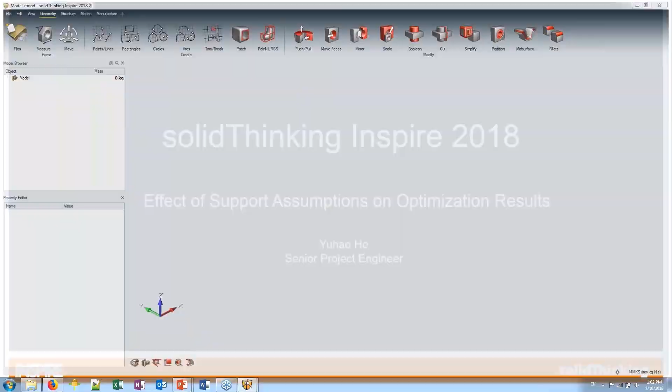Yeah, thank you, Tyler. I'm Yuhao from Altair, and today I'm hosting this webinar about solidThinking with GoEngineer. Today's topic is about the effect of support assumptions on optimization results.

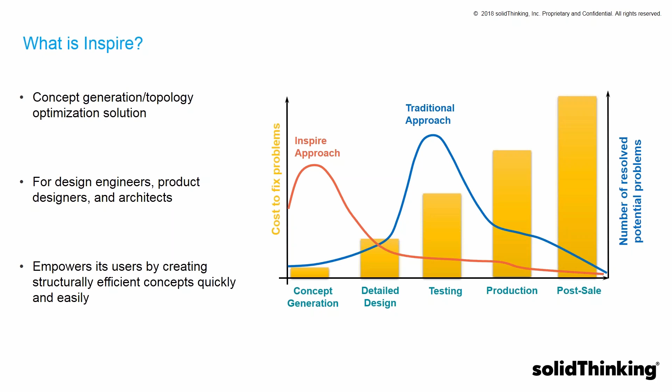With Inspire, the idea is to help engineers identify and fix problems earlier, especially in the concept generation phase. So a lot of potential problems will be identified and fixed in the concept generation phase, so that fewer problems will be identified and fixed in the later stages. This way, the company can save development cost and development time by using Inspire.

Today we are going to mainly talk about three topics. What are support assumptions? How Inspire can help users take those into consideration, and why proper assumptions are important. First, what are support assumptions? Here, I'm going to use this example to explain.

In this example, there is a vertical I-beam and a horizontal I-beam, and I'm designing a bracket to connect those two parts. A 5,000 Newton load is applied on the end of the horizontal I-beam, and there is a 5,000 pretension load on each bolt. There are 16 candidate positions for the ribs, and I would like to determine the best positions for 6 ribs.

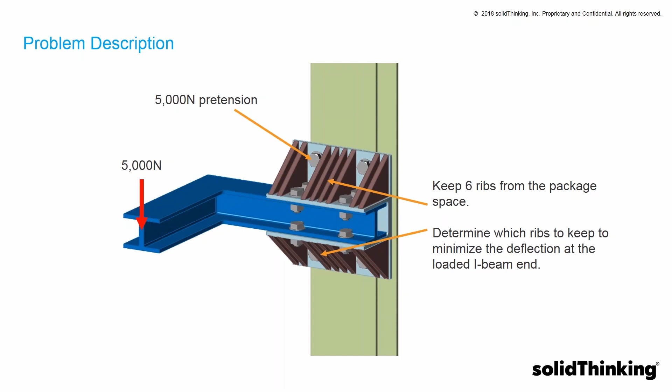That means I would like to keep only 6 ribs, but achieve the maximum stiffness so that the loaded end of the I-beam will have the minimum deflection. So today I'm using topology optimization to answer a pretty classic engineering design problem instead of creating any organic or innovative structures here.

So for the simplest setup, we could set up the optimization problem by fixing the 4 bolt holes attaching to the vertical I-beam, and applying a remote load through a spider, and the load will be applied to the bolt holes connecting to the horizontal I-beam.

With this assumption, we actually assume all loads are transferred through bolt holes, and the vertical I-beam is very stiff, much stiffer than the bracket, so its compliance can be ignored. And the horizontal I-beam stiffness won't change the load path in the bracket.

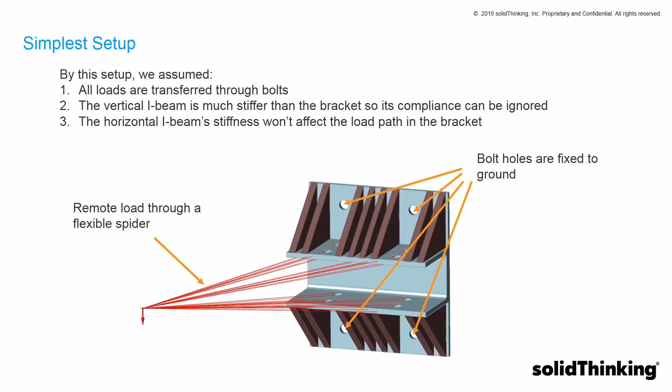So what are we missing here by this assumption? First, we miss those 2 I-beams that have comparable stiffness as the bracket. Also, there is contact between the bracket and the I-beam, and also the pretension bolt.

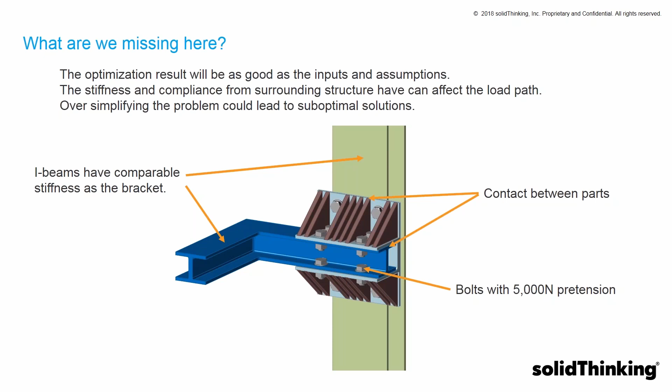As we may know, the optimization results will be as good as our inputs and assumptions. And the stiffness and compliance from surrounding structure can affect the load path in the bracket and also the topology optimization result. If we oversimplify the problem, we could get a suboptimal design or solution.

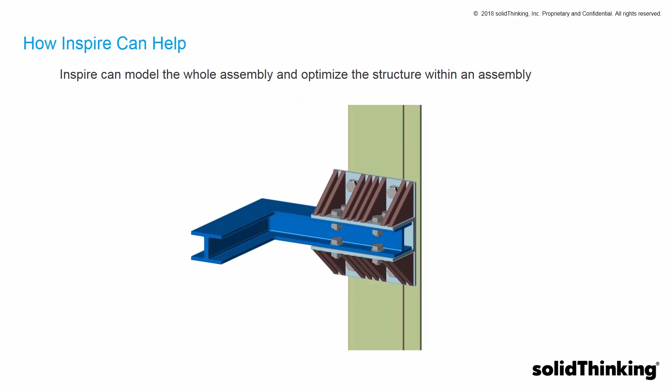So how can Inspire help here? First, Inspire can model the assembly and optimize the structure within a complex assembly. Also, Inspire can simulate the contact with different levels of complexity. I will explain about those later in more detail. And also, Inspire can model the pretension load, pretension bolt.

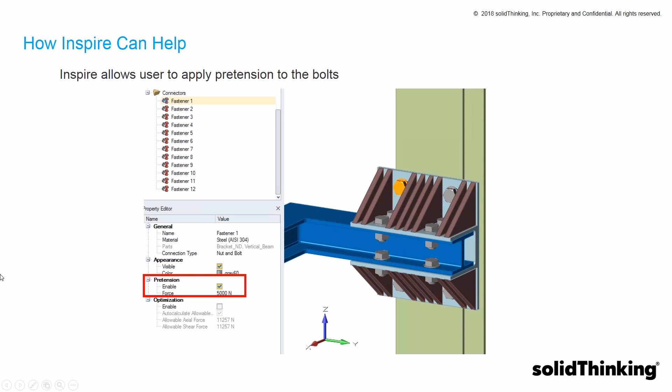Why are proper assumptions important, or what difference can we produce with different kinds of assumptions? Here, I'm having 4 different levels of complexity to target this problem. That is, keep 6 ribs from the 16 candidates and produce the stiffest design. The first simplest setup is I only model the bracket, so there is no contact, no bolts at all.

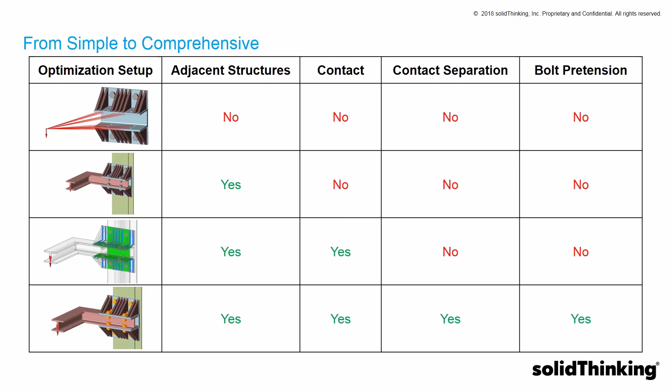Here is the summary table of different setups and assumptions. First, as you can see, with different setups, the optimization gives me different designs. And with these 4 setups, the designs are all different. They all have 6 ribs.

To compare their performance, I use this full design space as a reference point, because no matter how I optimize the 6-rib design, it won't be as stiff as this 16-rib bracket. I just use its performance as a reference point. And the displacement value is the displacement at the end of the loaded I-beam.

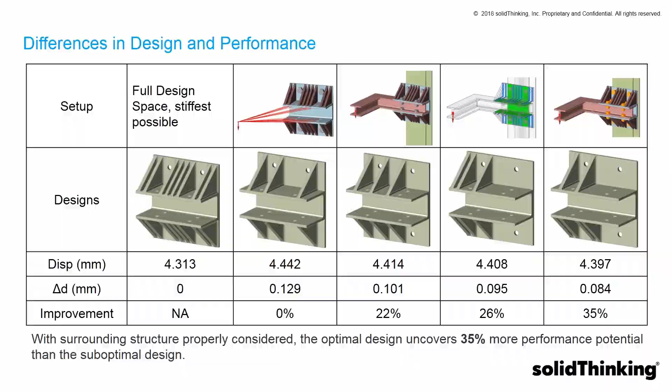And here you can see, with the surrounding structure properly considered, the optimum design can uncover 35% more performance potential than the suboptimal design. I'm going to show you 2 setups in Inspire. One is the simplest setup, bracket only, and the other is the most comprehensive one. First, as you can see, Inspire can read most common CAD formats.

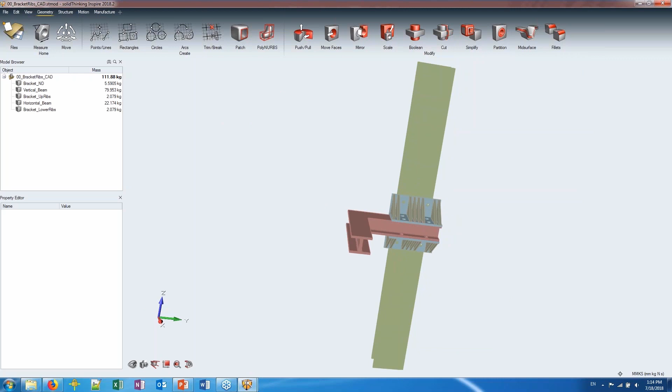Here is the model. First, I'm going to apply a remote load at the end of the I-beam, and I need to determine the center of this end. You can see it snap at the end, so it's very easy to determine the geometry.

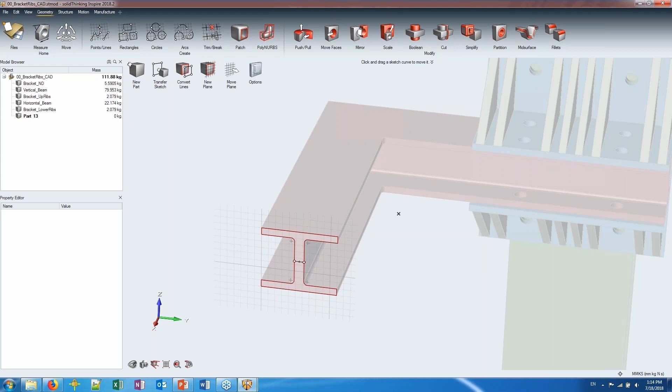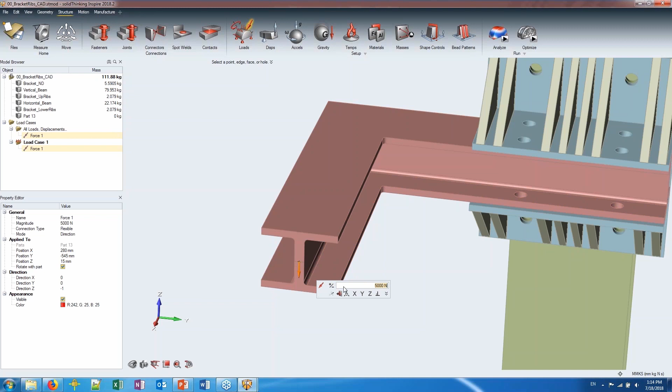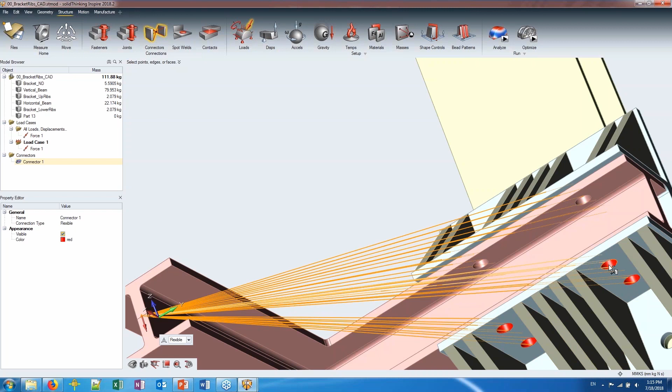And now I'm applying the 5,000 Newton downward load in Z direction. And I'm attaching this load to both holes here. Okay, with the load setup, I can delete the I-beams because I'm not including them in the model.

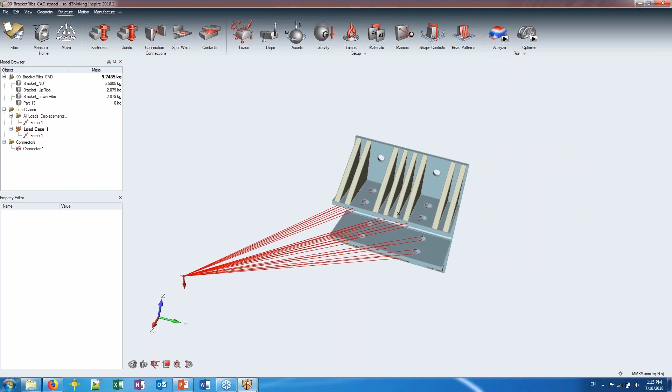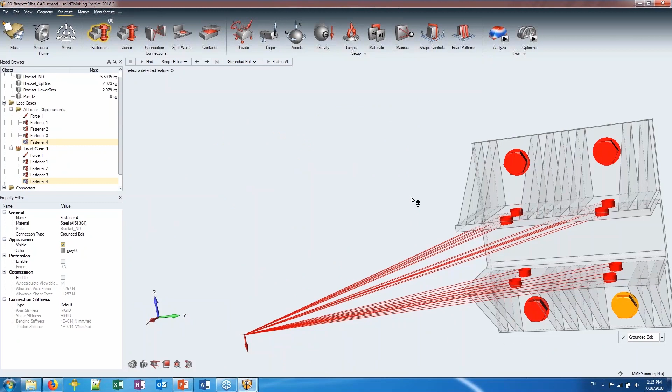Then I use this fastener to identify single holes and have some grounded bolts created through the holes to fix those holes to the ground. Now I'm making the ribs as design space. This way I tell the solver and optimizer that it can remove material from the design space and leave a portion of the material that I ask.

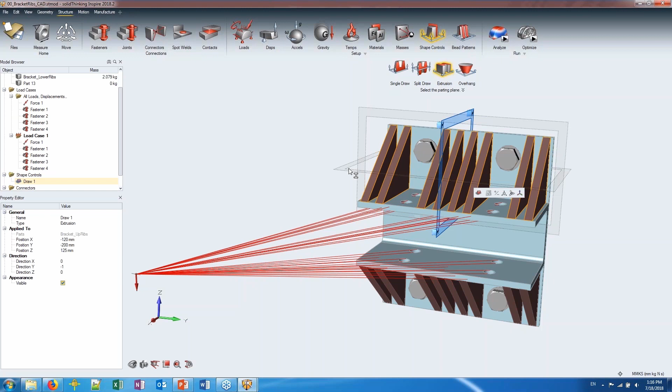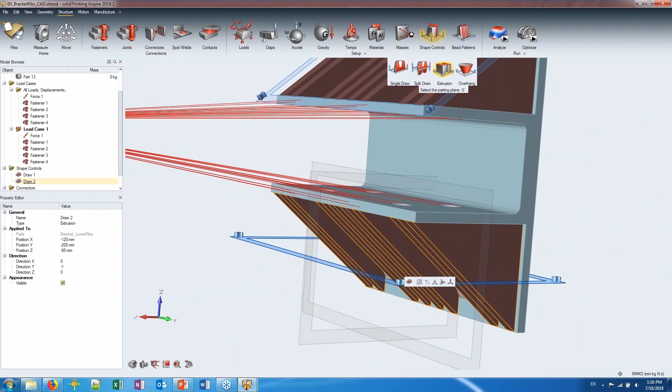To make the design easier to interpret, I use this shape control, so the result will be denser and easier to understand. I'm here using the extrusion control. That means I enforce the cross-section to be consistent along this direction, but the part is not necessarily made by extrusion. With this setup, the model is ready to run.

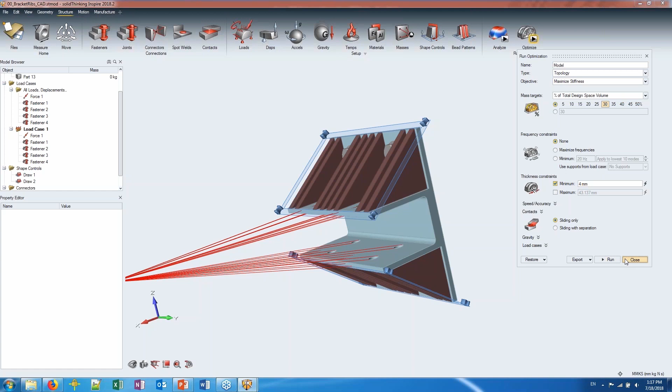We have the topology optimization, and the objective is to maximize stiffness. And I want to keep a certain percentage of the volume within the design space. Minimum thickness, I want it to be 4 millimeters. And the run can start by clicking this run. And I have a model ready with the results, and we can look at that together.

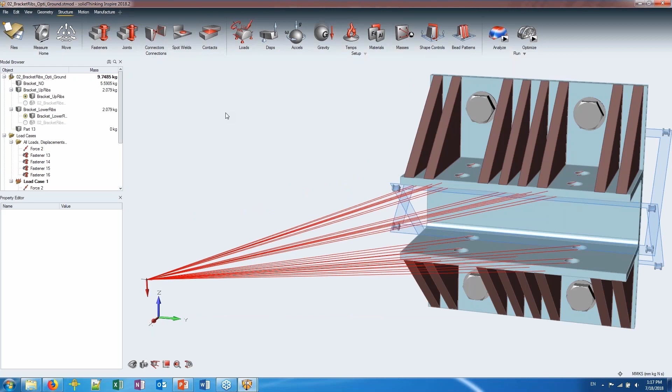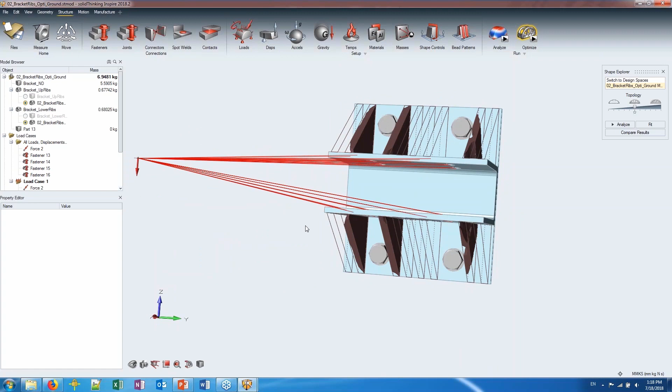We can review the results by clicking the optimization button here. And you can see it indicates 6 ribs. Even though they are not full ribs, we can interpret them as full ribs. Basically, it identifies the 6 most critical ribs under this setup and shows me a hint for the design.

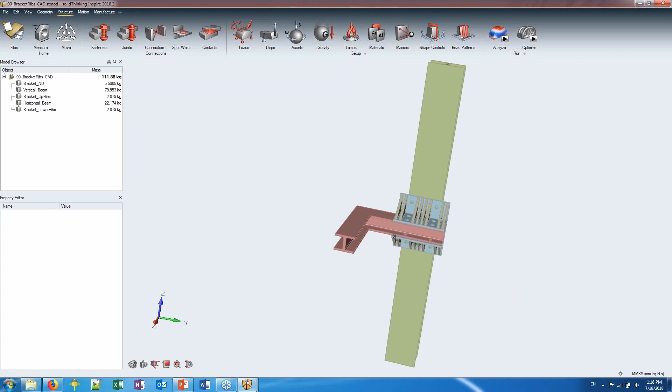Then I'm going to show you the most comprehensive setup. Here, first we connect the parts with bolts. You can see Inspire automatically identifies those bolt holes, and I just need to click fasten and it creates bolts for me.

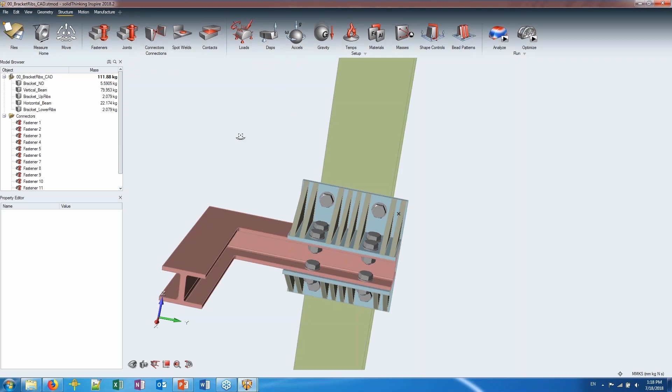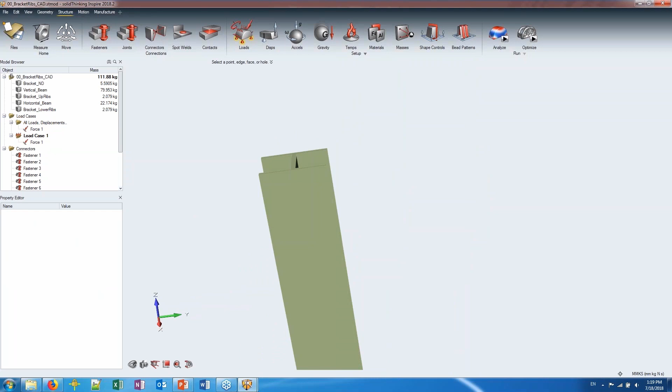Then I'm applying 5,000 Newton downward load, and fixing the 2 ends of the vertical I-beam as support.

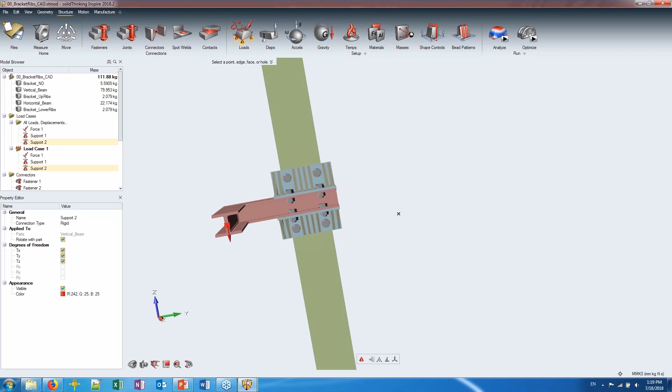We have 5,000 Newton pretension load on the bolt. Here I can select all the fasteners and enable pretension with 5,000 Newton.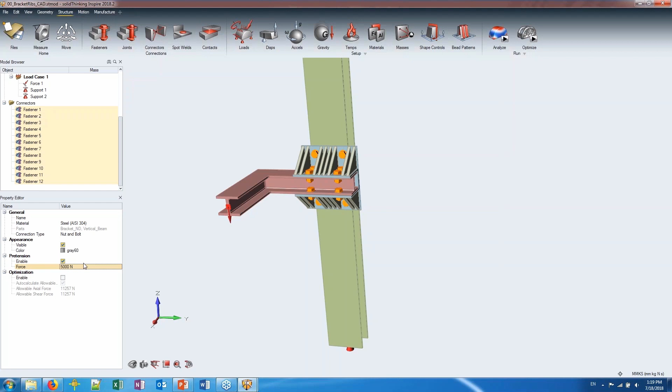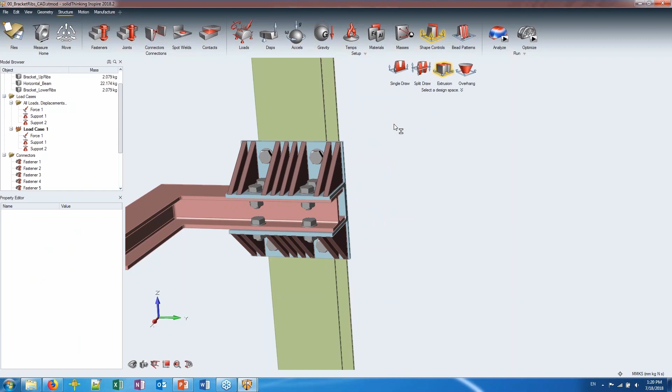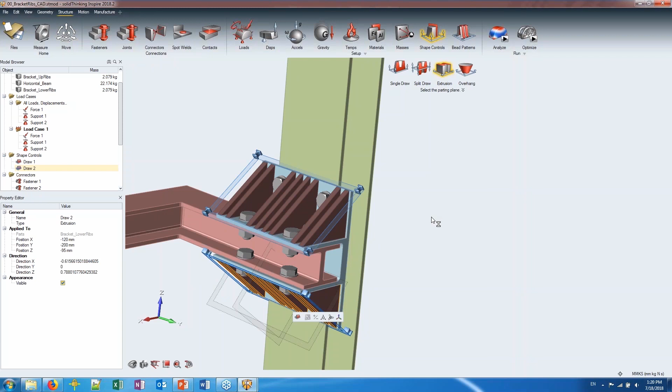Inspire automatically identifies the contact. If I click the contact button, you can see the green surface is a regular contact and the blue surface is bonded contact.

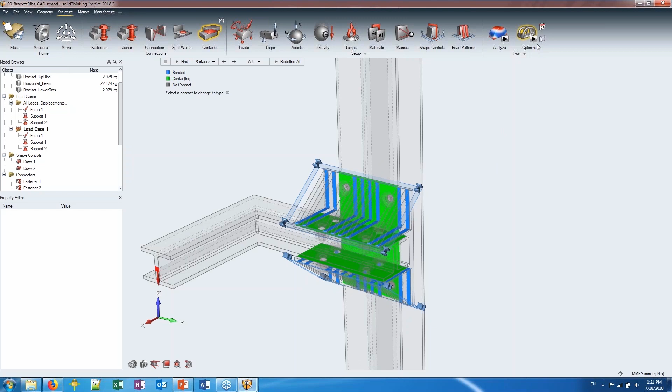For the regular contact, when I submit the job, I have options. Either the contact is sliding only, which is simplified contact behavior, or I can ask the contact to be able to separate if the load asks it to do so. This is a more physical behavior of the contact, but also takes more power to solve the problem.

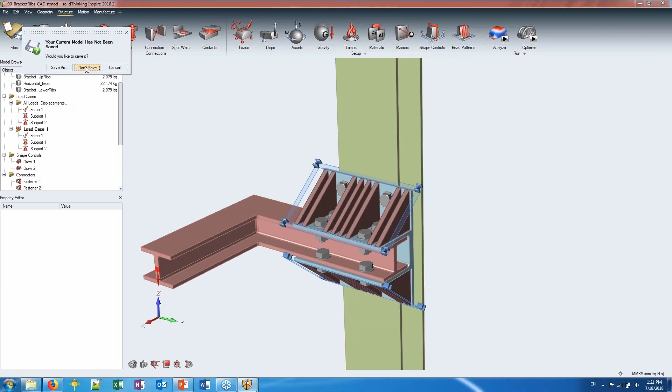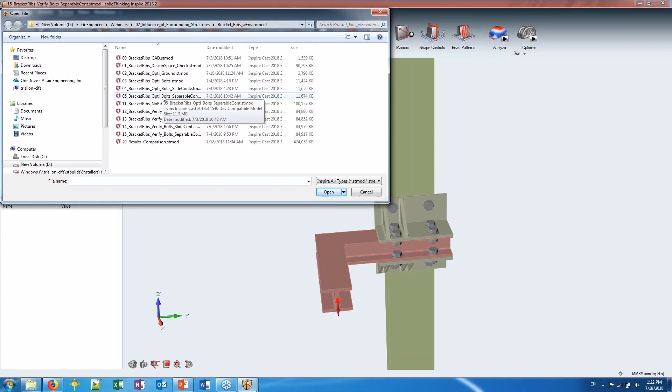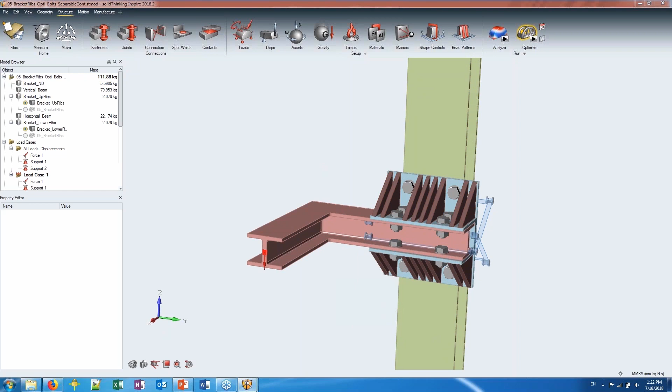Again, I have a model with the results ready, and I can review the results here. You can see the topology optimization identifies 6 ribs for me, but the locations are different than the previous setup.

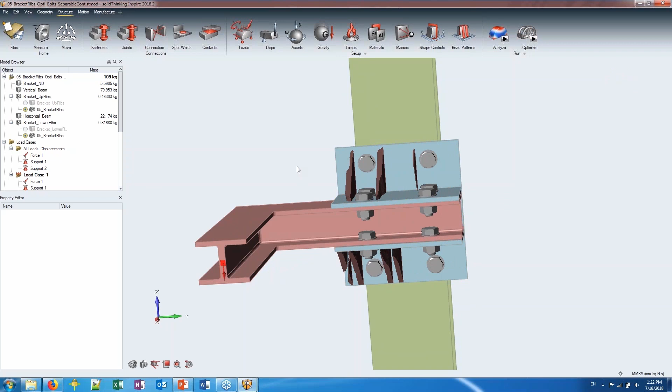Now I can create the concept based on the topology results, and it's also very simple to set up. First, I unmake the design space and separate those bodies into individual parts.

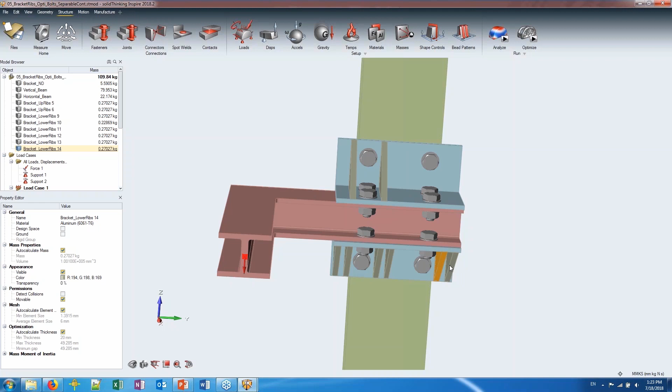Delete the rib that's not indicated by the optimization, and only keep the necessary one. I can boolean the ribs with the bracket together to make them one piece, and then create some fillets at the corner.

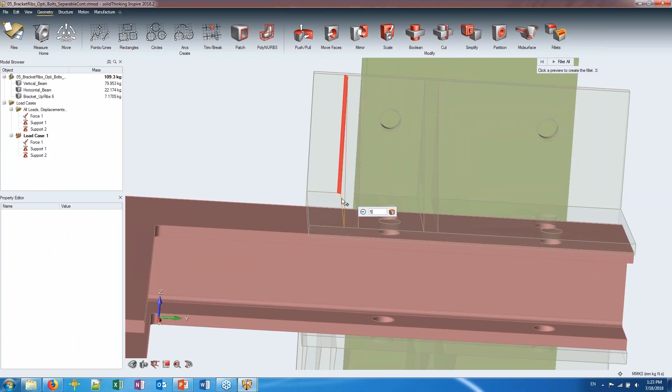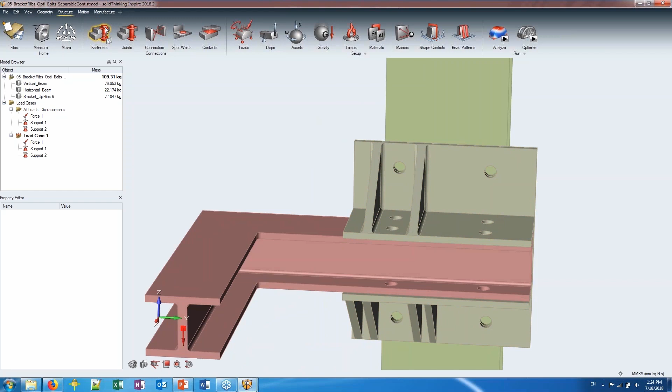Same thing for the lower ribs, I'm not doing that here. You can see both are deleted because I merged the parts together, putting the parts together. I just need to rebuild the body, just a click, and it's starting — everything's created.

And apply the pretension to the bolt again, and I can run the analysis with proper mesh density and contact that can be separable.

Here I have a model that imports all setups, all designs together, and we can compare their performance side by side.

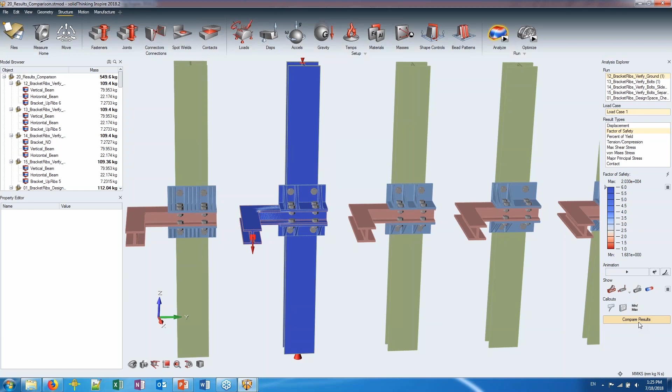You can review the results here, and at the bottom corner we have a compare result. I can see their performance and their mass. The mass of the four designs will be the same because I kept 6 ribs for each.

And here you have the maximum displacement to compare.

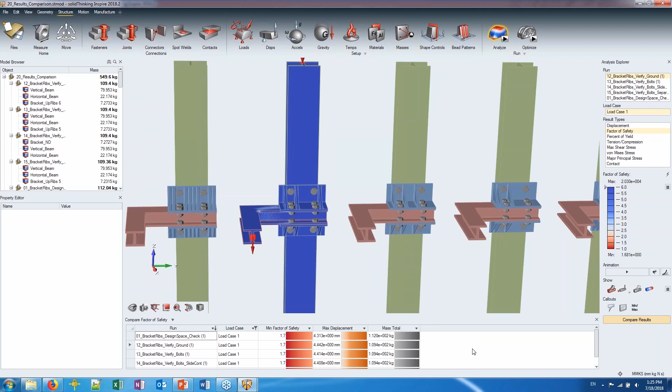So several points I'd like to discuss with you before ending this webinar. First, properly taking surrounding structure into optimization should produce a more efficient concept.

Adjacent structure has a bigger influence on the optimization results in two scenarios. One, the surrounding structure stiffness is similar in order of magnitude to the optimization target. For example, in our case, we have a vertical I-beam attached to the bracket.

If I have a solid piece of block, then its stiffness is much higher than the bracket, so we probably can assume it's perfectly rigid.

Another scenario is when the surrounding structure stiffness is not uniform or homogeneous. For example, if we have a tube, imagine you cut a window on the tube, and if we design a structure that's close to the window attaching to the tube, then we probably want to take the tube into consideration because the tube stiffness is not uniform everywhere.

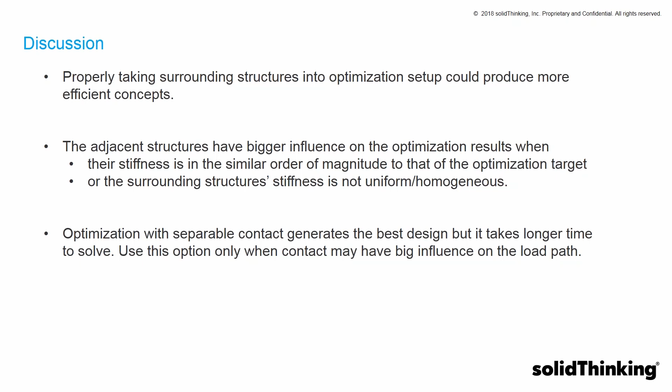And the last point is: optimization with separable contact gives the best design, but it takes longer time to solve the problem. I'd suggest you use this option only when the contacts are critical and play a big role in the load path. In our example here...

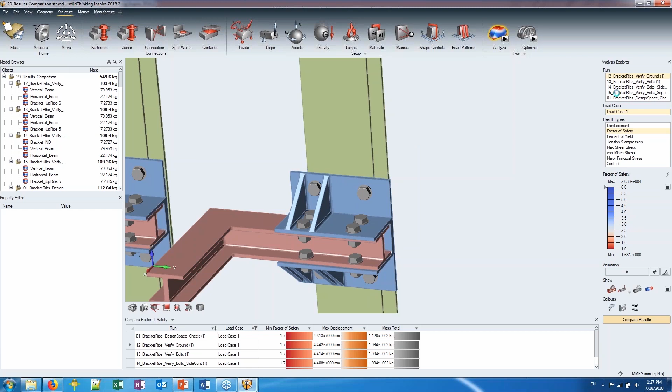You can see the last one — if I show you the deformation of it, the deformation here is scaled by a factor to more easily view.

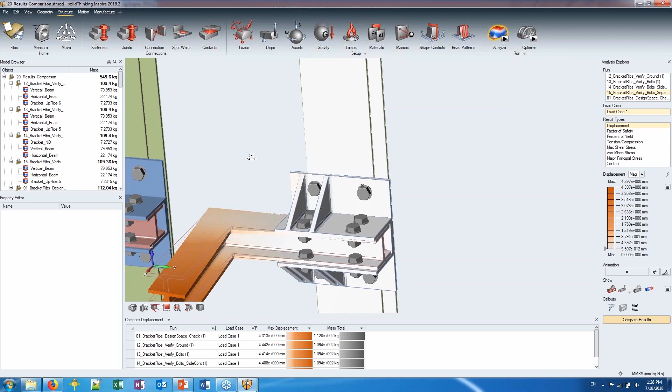And you can see it would identify the importance of the lower rib.

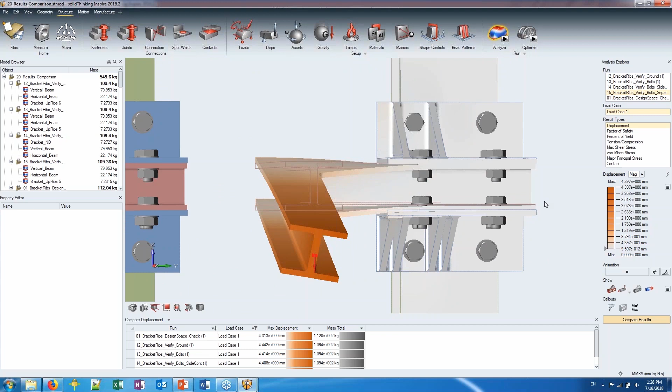If I have separable contact, you can see that the design is not symmetrical up and down because we have a physical contact behavior in the optimization. And the lower rib works better under compression because the horizontal I-beam pushes the surface downward.

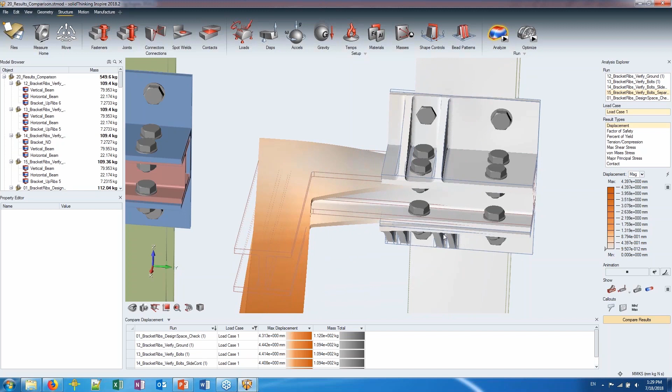And those two ribs can only be identified when we have a physical contact behavior. Otherwise, if you look at other designs, the upside and downside rib distribution are the same, symmetric about the horizontal plane.